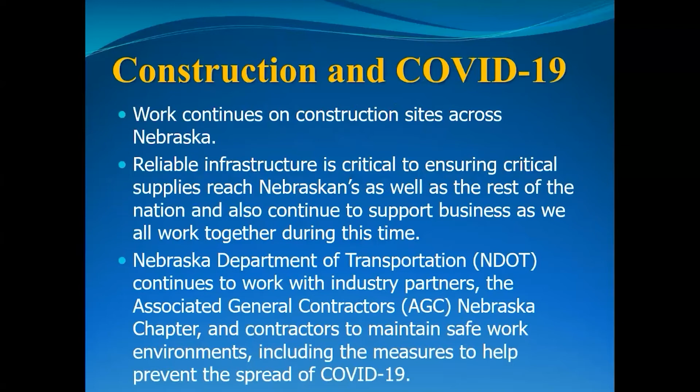First, I want to talk about construction and COVID-19. Work continues on construction sites across Nebraska. Reliable infrastructure is critical to ensuring critical supplies reach Nebraskans as well as the rest of the nation, and also continue to support businesses as we all work together during this time. The Nebraska Department of Transportation, NDOT, continues to work with industry partners, the Associated General Contractors AGC Nebraska chapter, and contractors to maintain safe work environments, including the measures to help prevent the spread of COVID-19.

We're also celebrating Work Zone Awareness Week in April of this year from the 26th through the 30th. NDOT is partnering with the AGC to help bring attention to work zone safety and how important it is for the driver, the worker, and their families. Our slogan for 2021 is Slow Down, Phone Down. Billboards will be up across the state expressing this safety message. April 28th is Go Orange Day to help recognize the importance of work zone safety.

When you come upon a construction zone, please slow down. Follow construction signs or flag person directions. Increase your following distance. Be patient. Do not drive distracted. And always remember, buckle up, phone down.

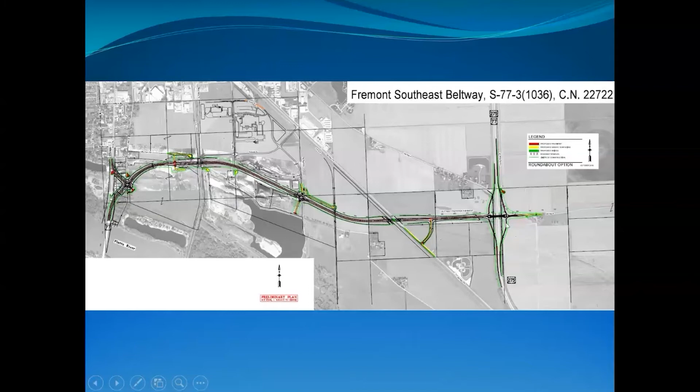Next project I want to talk about is in northern Dodge County on 275 from Scribner north. This is one of 3 projects that will be let this spring that will continue the 4-lane expressway from Norfolk into Fremont. The other 2 projects take you north of here into and through West Point.

The next project is in northern Washington County from Blair to Herman. This is a resurfacing and bridge repair project where traffic is currently being affected by traffic signals. It started March of this year and will be completed in fall of 2022. It's a 9.8-mile project worth $11.3 million. We'll now work into the Omaha metro area. On West Dodge Road, we have a project on L28B, which is called the Elkhorn River Approaches.

Next project I want to talk about is in northern Washington County, Blair to Herman. It's on US 75. It is a resurfacing project with 2 new bridges to be replaced. It actually started in March of this year, will be completed in fall of 2022. Traffic is currently affected by the traffic signals for those bridge replacement projects just south of Herman. It's a 9.8-mile project and worth $11.3 million.

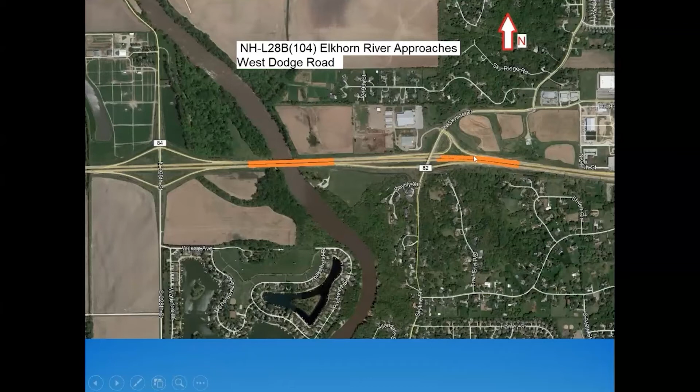Westbound Skyline on-loop will be closed during a portion of this project. We will make a connector between the ramp and the loop to allow us to construct mainline pavement on westbound L28B.

We'll now work on projects that are on I-80. This first one begins on Highway 66 interchange, which is the Mahoney interchange on the west side of the Platte River, and continues over to Highway 50 interchange. It's a pavement repair and a joint sealing project, 16.5 miles in length, and it's worth $4.3 million. We'll start this spring and be completed this fall.

Next project I want to discuss is on I-80. Begins on Highway 66 and continues to Highway 50. Highway 66 is the Mahoney interchange on the west side of the Platte River. It's 16.5 miles in length. It's $4.3 million. It will start this spring and be completed this fall. It is a pavement repair and a joint sealing project. It will be done at night, and the contractor is limited to 2-mile work and lane closure segments in either direction.

Next project is a similar project on 680, beginning at I-80 and traveling north to Fort Street. It's again a pavement repair and joint sealing project. It's 5.8 miles in length, $5.6 million worth of work. We'll start this spring and be completed this fall. Again, this is a night work project.

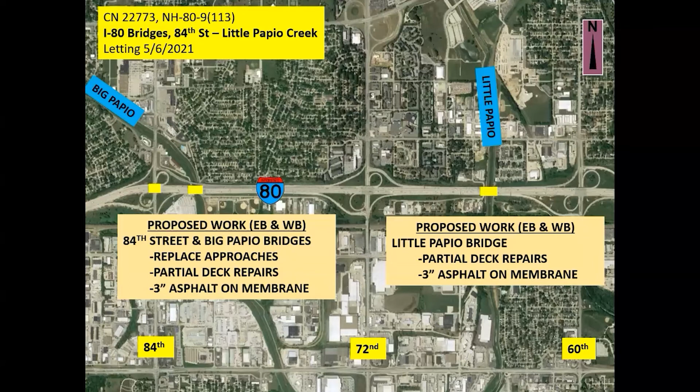The Little Papio Creek has an average daily traffic of 182,000 vehicles per day, and because there is no approach slab work, we can do all this work at night, and the contractor will be allowed to work in the eastbound direction during the Olympic swim trials and College World Series break.

This phase can begin on July 6th, where the 84th Street eastbound on-loop, eastbound on-ramp, westbound on-loop, and 72nd Street westbound on-ramp are closed. Upon completion of this phase, the westbound traffic can revert back to the westbound lanes with the westbound loops and ramps open.

The next phases after what you're seeing here are in the eastbound direction, where we will keep traffic in the eastbound direction the same configuration and rebuild the inside of the bridges. Upon completion of that phase, we will shift traffic to that newly completed repair work and then work on the outside of the bridges. We anticipate all this bridge construction, including the Little Papio Creek, to be completed by Thanksgiving of this year. And we anticipate the 84th Street eastbound ramp closures will have a duration of 115 calendar days.

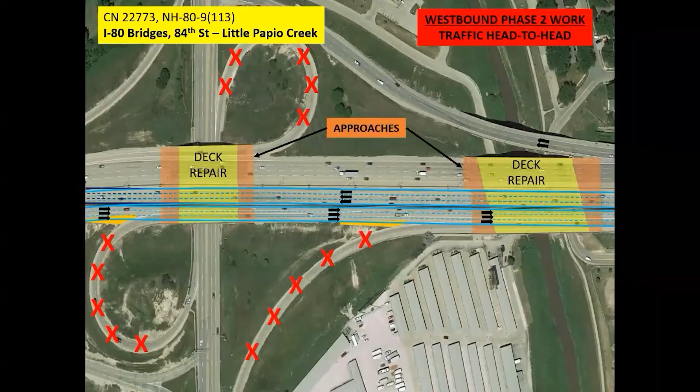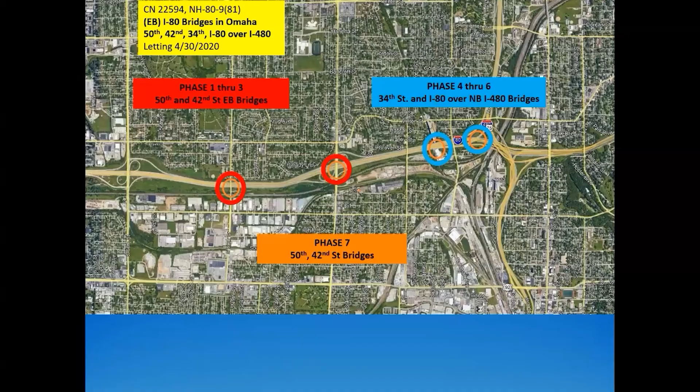First project here in the system interchange are these 11 bridges on US 75. It's $3.8 million worth of work. It will start in July of this year and be completed this fall. There is night work with extensive phasing. Traffic problems should be minimized with the night work.

The next project is I-480, beginning at 20th Street over to the Missouri River. A 2-mile project worth $43.9 million. It actually started in March and will be completed in spring of 2023. There is extensive phasing with a 30-day closure of I-480 in each direction to replace approach slabs and repair the abutment at 20th Street, which is at the west end. There are also extensive ramp closures necessary for the construction of these ramps with some nighttime and long-term closures.

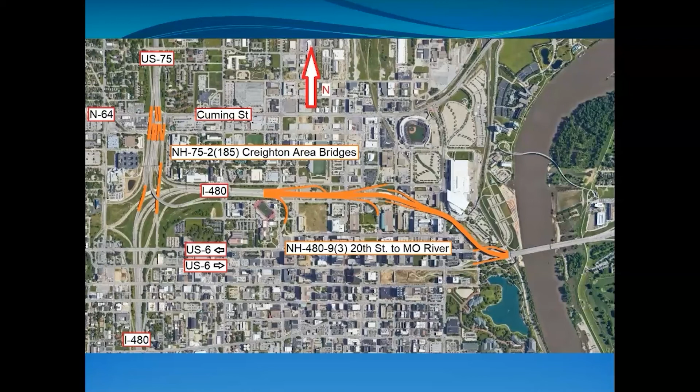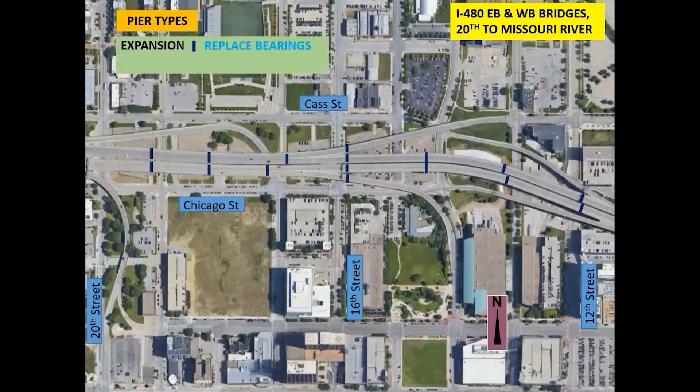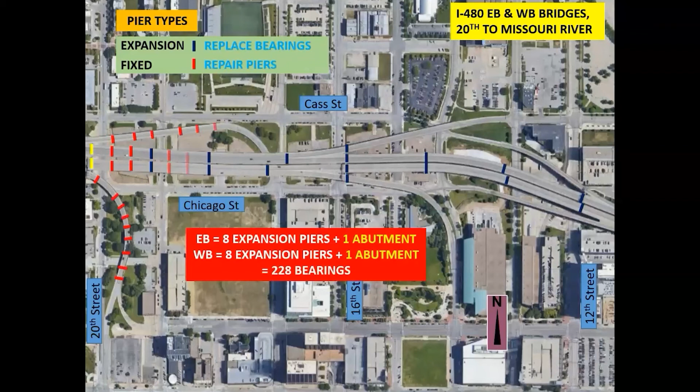Not only are we affecting traffic, but we are affecting parking as well, as this project requires extensive coordination and phasing with Omaha on the parking lot closures beneath I-480. Let me give you a close-up of what's actually happening there. This aerial shows you the expansion piers where we have to replace the bearings. And again, this is under live traffic. In the eastbound direction and the westbound direction, there are 8 expansion piers plus the abutments. At 20th Street, there are a total of 228 bearings that have to be replaced. There are also fixed piers that need to be repaired, and there are approximately 60 of those on this segment.

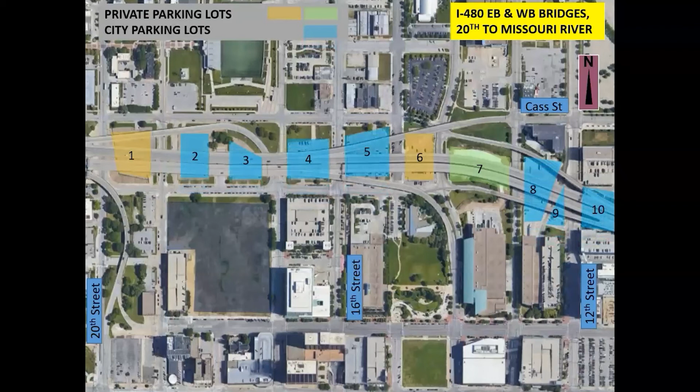Parking lots underneath: parking lots 1, 6, and 7 are leased out to private individuals or private companies. Parking lots 2 through 5 and 8 through 10 are leased out to the City of Omaha. There are 3 types of parking lot closures: long-term, over 48 continuous hours; short-term, under 48 continuous hours; and partial, where we must just worry about individual parking stalls around any individual pier for a determined length of time.

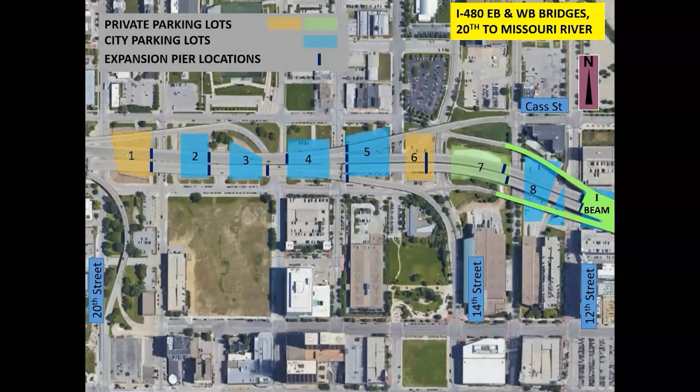Back to the expansion pier locations again to show you where these are based on where the parking lots are. To the right is the I-beam. There are 2 types of girder structures on this entire length of bridge. In the segment from 20th to 12th Street is what's called a tub girder, where the bearing devices are internal. And then you have the I-beams from 12th Street over to the Missouri River, where the bearings are exposed and much easier to replace or inspect, and they don't tend to have the damage.

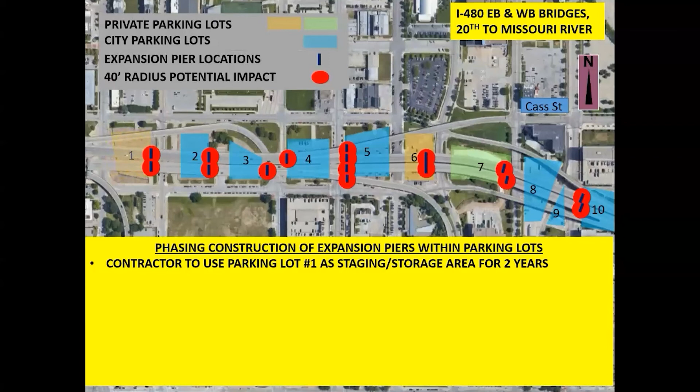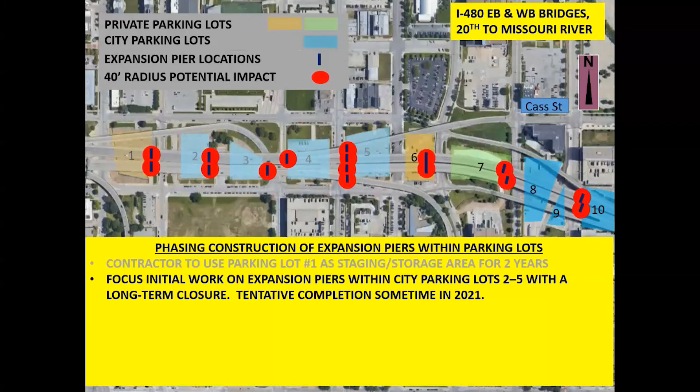We're assuming a 40-foot radius potential impact around each one of these expansion piers. With our phasing, our contractor can use parking lot 1, which is by 20th Street, as a staging and storage area for the entire 2 years of the project. The contractor will focus on the expansion piers between lots 2 and 5 in 2021. As soon as we're done with those, the city will begin rebuilding those lots after expansion pier work is completed. Expansion piers in lots 6, 7, and 10 are limited to a 90-day long-term closure.

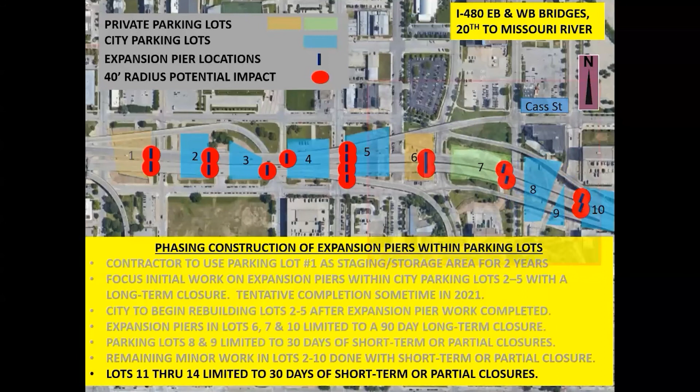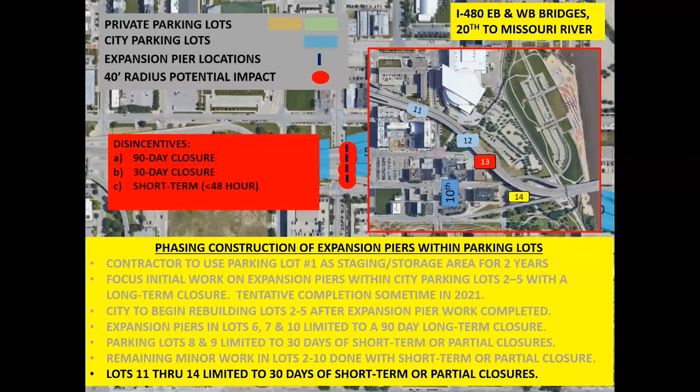Parking lots 8 and 9 are limited to 30 days of short-term or partial closures. Any remaining work in these lots will be done under short-term or partial closures. And lots 11 through 14 will be limited to 30-day short-term or partial closures. There are disincentives for each one of these closures in order to speed up the work on these piers.

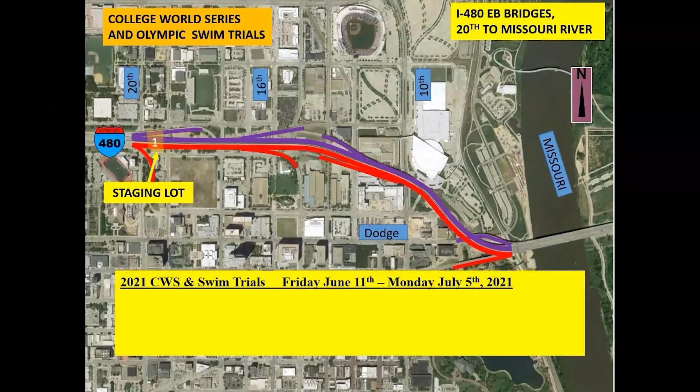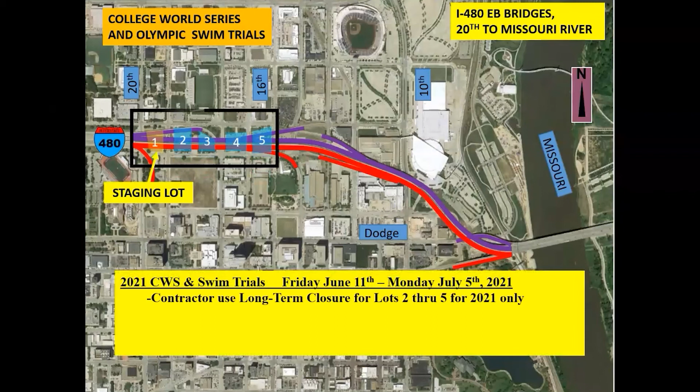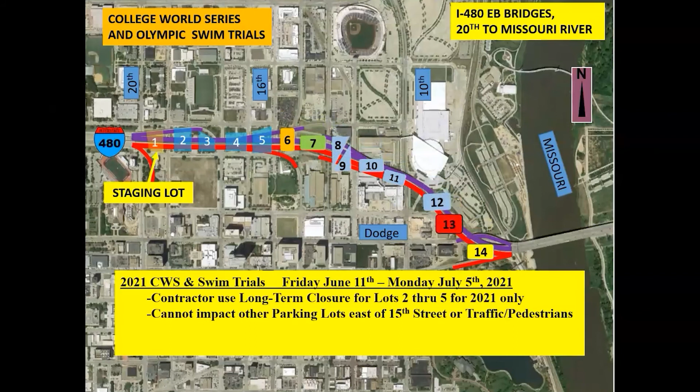We do have, again, the College World Series and Olympic swim trials in the next 2 years for the life of this project. In 2021, parking lot number 1 will be closed for the entire 2-year period. Parking lots 2 through 5 will be worked on during the College World Series and the Olympic swim trials event, but no other parking lots can be affected east of 15th for traffic or pedestrians. In 2022, there are the dates for the next College World Series, and we cannot impact any parking lots or traffic or pedestrian facilities except for lot number 1.

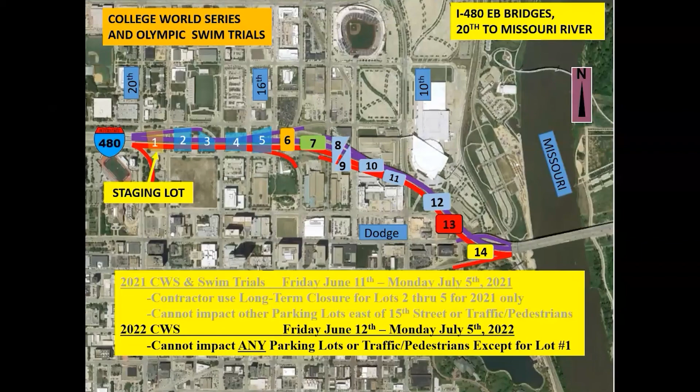We do have one 2019 carryover project in Murray on Highway 1. It's called Murray to US 34. It consisted of new pavement, new viaduct, and mechanically stabilized earth walls. It's a mile in length, worth $12.7 million. It started in the fall of 2019 and was supposed to be completed in fall of 2020. However, there were some delays and it will now be completed in fall of 2021. The last phase is to construct the bridge.

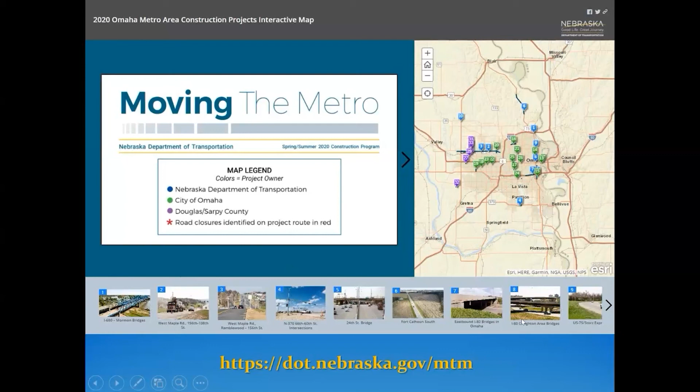This is just a snapshot, but with the live map, you can go into the map and click on any one of these icons, and it will pop up the information on the project to assist the traveler. Or they can go to the bottom where the photos are, and the numbers on these photos coincide with the numbers on the map, and click on these and also get the same information. With that, this is the program map for 2021.